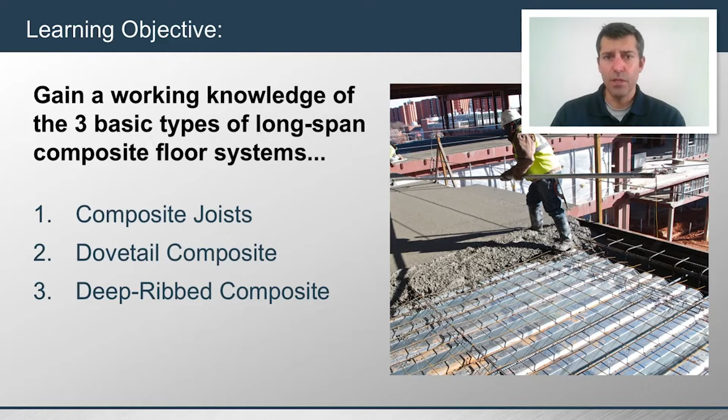The learning objectives for this short course are to gain a working knowledge of the three types of long-span composite floor systems that support multi-story design and construction: composite joists, dovetail composite, and deep-ribbed composite, including installation images of these three unique systems. This multi-story course applies to construction for both residential and commercial projects.

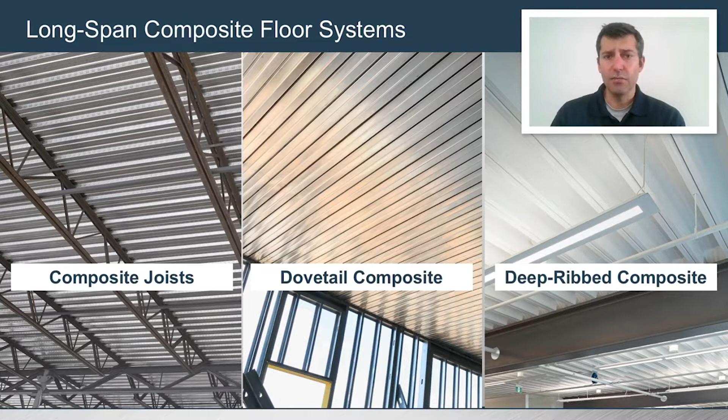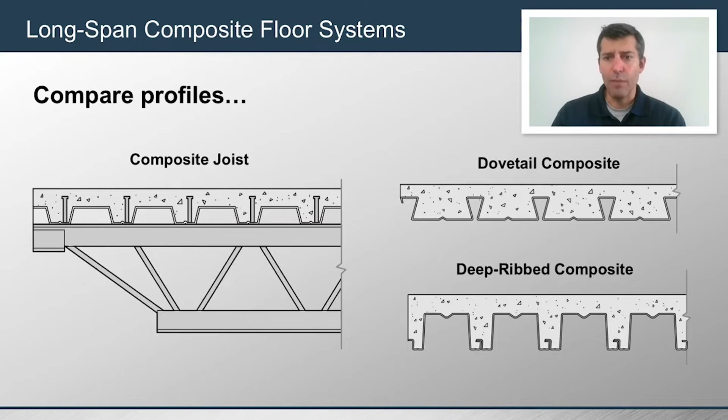Graphic cross-sections illustrate the distinguishing profiles of these systems. The joist, with its characteristic diagonal web members, has a standard deck. Dovetail and deep-ribbed deck represent deck-only long-span composite floor solutions.

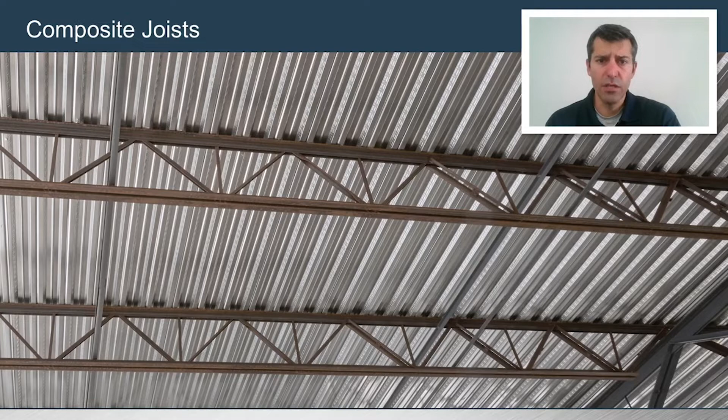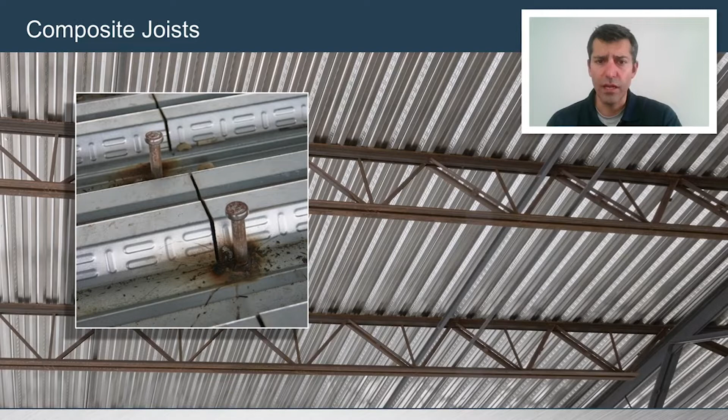Let's start with composite joists. Similar to its counterpart in roof applications, the composite joist has its familiar shape, the defining feature being the studs welded to the top chords of the joist. You will also note the composite floor deck with its identifying trait, embossed sidewalls.

Composite steel joists allow long, clear spans beyond 60 feet. Compared to wide flange beams, they are significantly lighter, which can lighten the entire structural system. In its totality, there is an overall reduction in steel. This leads not only to material savings, but also savings in manufacturing, shipping, on-site staging, and erection costs. The combined time saved may even lead to earlier building occupancy.

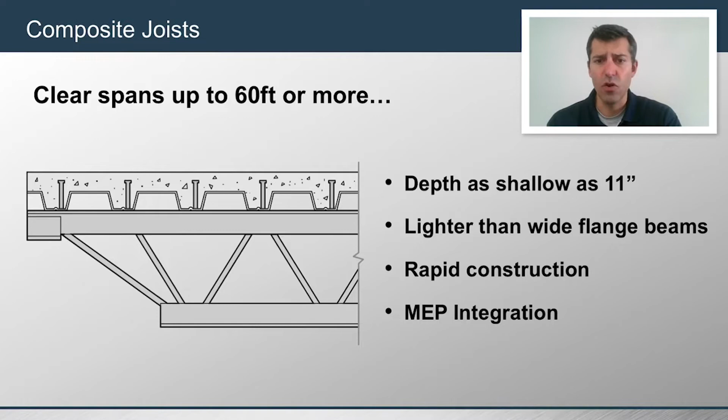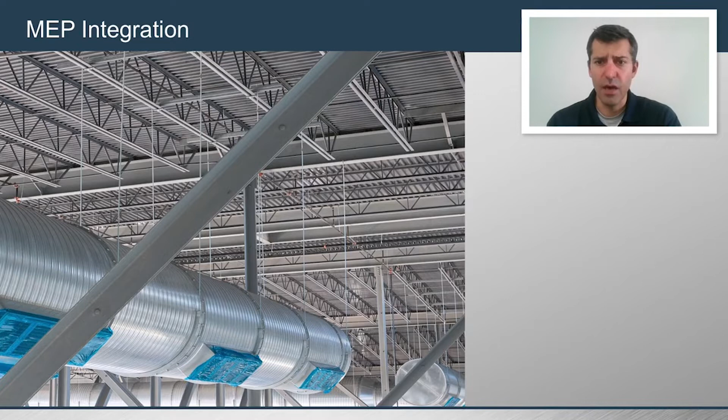Composite joists require no shoring, and identical to roof joists, building system integration is accompanied by web openings. For larger ductwork, the webbing can employ the design of a Vierendeel.

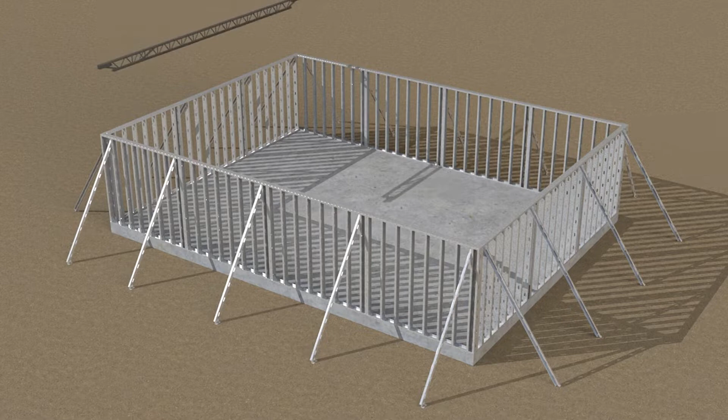A composite joist floor system is efficient to build and readily deployable in any market. In this instance, we'll assume a cold-formed steel bearing wall, but it can be a component in any structural system, steel or concrete tilt-up, for example.

The joists end bearing in this scenario, followed by the bridging. It should be noted, bridging types and end bearing conditions like top chord extensions are elaborated on in full-length courses.

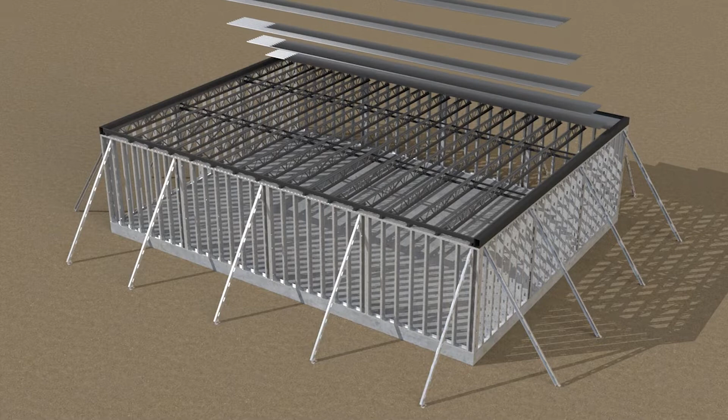The composite deck can be either a form deck, 1.5 inches, 2 inch, or 3 inches deep. Shear studs, followed by welded wire mesh, all come together to establish a unified, load-bearing system with the concrete topping slab. The structural goal is the composite action.

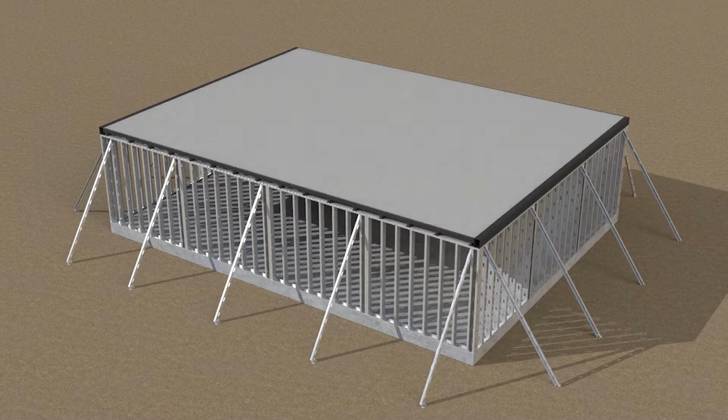Both the deck and the joist have a means to key into the concrete. This bond combines the tensile qualities of steel with the compressive qualities of concrete. Additionally, the concrete topping slab may provide benefits in fire rating and vibration, which varies based on total slab depth. Again, we see the combination of concrete and steel, playing to each material's advantage.

The shear studs attach through the decking to the joists embedded in the cured concrete. Note that composite joists, to achieve a fire rating, would require protection. That could be in the form of fire-resistive coatings like intumescent paint, or boxing them out in fire-rated gypsum wallboard.

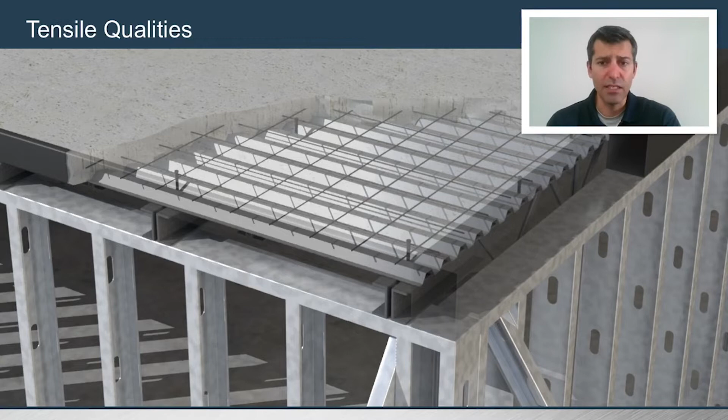The result can be concealed in a drywall hard lid or exposed, contingent on aesthetic goals and fire rating for the occupancy. Composite joists are just one option for large-scale open floor plan projects, ideal for the expansive showroom of this Ferrari dealership.

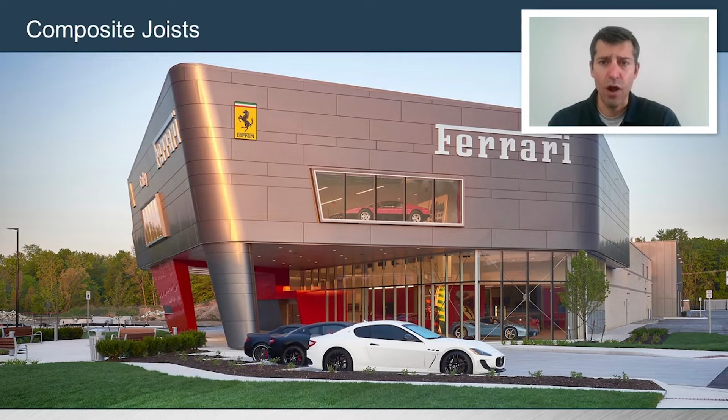Next, we'll shift our attention to dovetail composite. This profile has options in 2 inch and 3.5 inch, having long spans relative to thin floor plates. With simple spans able to achieve 17 feet and continuous spans up to 28 feet, projects can go up quickly and efficiently without specialized labor.

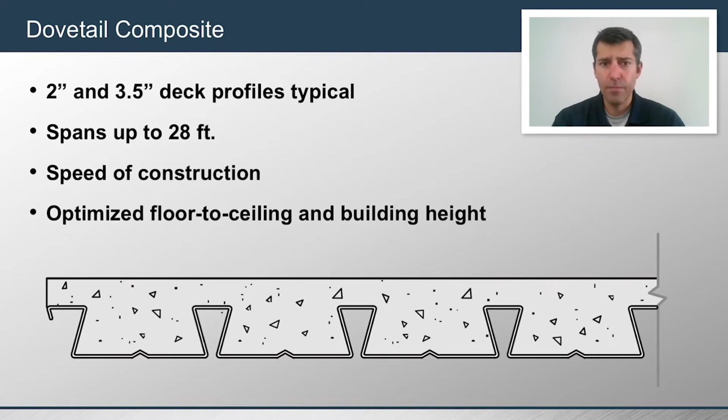A major advantage of the system is the fire-rated designs. The classic slab design is the 2 inch dovetail that, with a 3.25 inch topping slab, elicits a 2-hour UL-rated assembly in only a 5.25 inch total slab depth. The assembly has multiple variables, creating flexible solutions based on the design team's criteria.

Specifying lightweight concrete in lieu of normal weight, the cover is reduced, lightening the entire system. Picking up an hour rating from Type X gypsum wallboard can also reduce concrete volume. Solutions can result in gaining full performance with only a 4-inch total slab depth. These monolithic thin floor assemblies create floor-to-ceiling heights and optimize total building height.

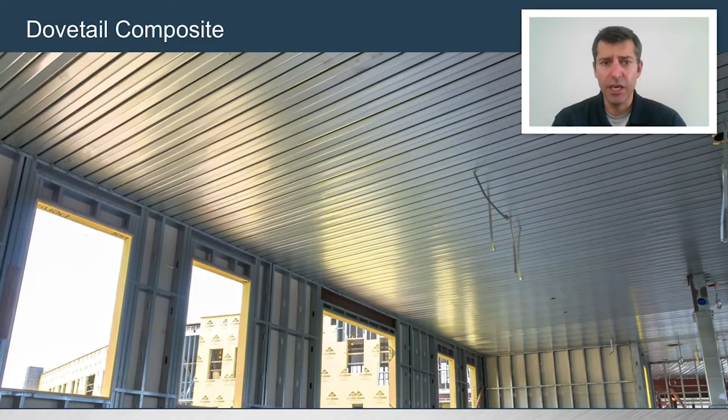Panelizing metal stud walls has revolutionized mid-rise construction. All the benefits of steel construction economize to fit into any project budget.

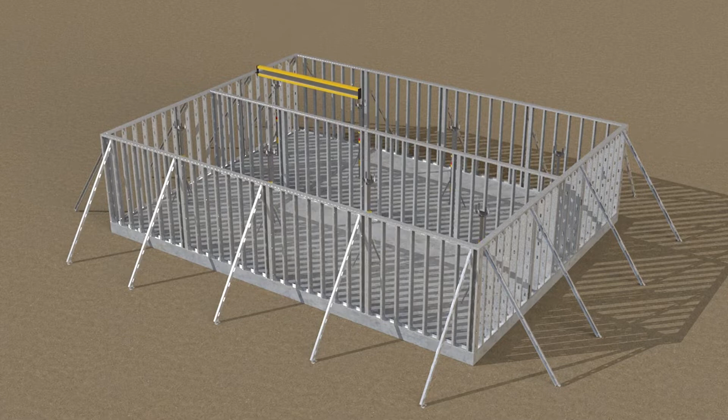Assume the middle bearing wall requires fire separation. Next come the row of temporary shoring in yellow. An alternative design, like using 3.5-inch dovetail, may be able to simple span a given condition. But in this animation, we're assuming the 2-inch dovetail requires at least one row of shoring. Pour stops prior to the deck installation.

Again, the erection is similar to any composite floor deck. Note the accessory at the head of wall. We'll come back to that in a moment, as the dovetail deck is installed.

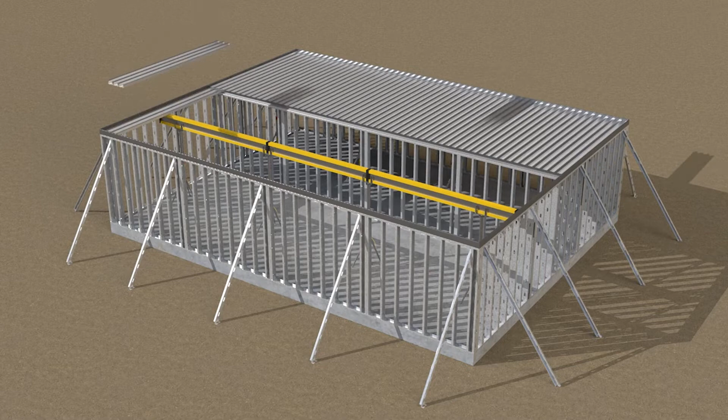Dovetail Composite is ideal for mid-rise construction. The market has seen the greatest benefit is multi-story residential. These are hotels, dormitories, senior living, any kind of multifamily design.

Let's focus on the cutaway of the assembly. The deck bearing on metal studs, concrete filling the cavity. No permanent interstitial beams, only temporary shoring until concrete comes up to strength. The result is an uninterrupted fire-rated slab.

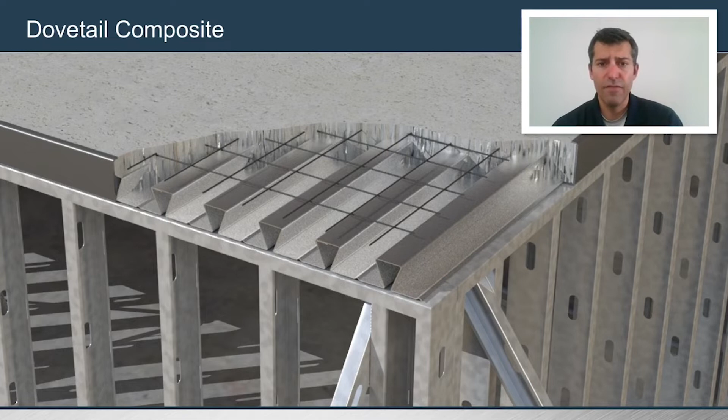Transitioning to the head of wall detail. This is the brake metal accessory mentioned during the animation. It creates a condition that does not require fire sealant at this condition. Sealants can be expensive and labor-intensive to install.

By offsetting the dovetails, it creates a UL-rated head of wall, eliminating potential fire transfer at the bearing wall between the units. The concrete cover is continuous. The fire sealant would be required at conditions in which the deck flutes are not staggered, either continuous spans or end-of-wall conditions. Strategies to streamline and address constructability are elaborated upon in the hour-long course.

Additional accessories available by the deck manufacturer are hanging devices specific to the dovetail profile. They are typically used for lighting, plumbing, and ductwork. The wedge-shaped hangers are adjustable and can be relocated anytime if desired.

Now, that's not typically a strength of the residential system, and it's more so popular in exposed roof deck applications, as it avoids the need to permanently puncture the deck.

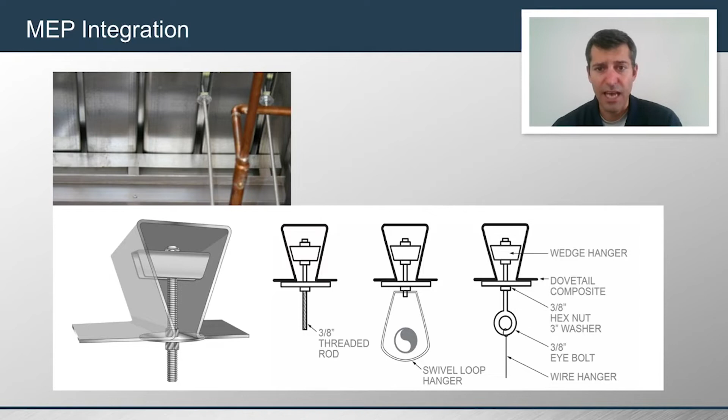Critical to any successful project is properly addressing acoustics. In residential construction, the key metrics are sound transmission class and impact insulation class. 50 for each is the bare minimum. Building up the floor assembly or ceiling assembly helps to boost STC and IIC.

Commercial applications like a multi-story office with an open floor plan are concerned with a different aspect of sound, NRC. Acoustic ceiling tile is the standard fare solution to ambient noise, but there are ways to address NRC values by exposing the floor deck. Dovetail Composite Acoustical, in the upper right-hand corner, gives the design team the aesthetic of an architectural deck with a performance that can transcend acoustical tile.

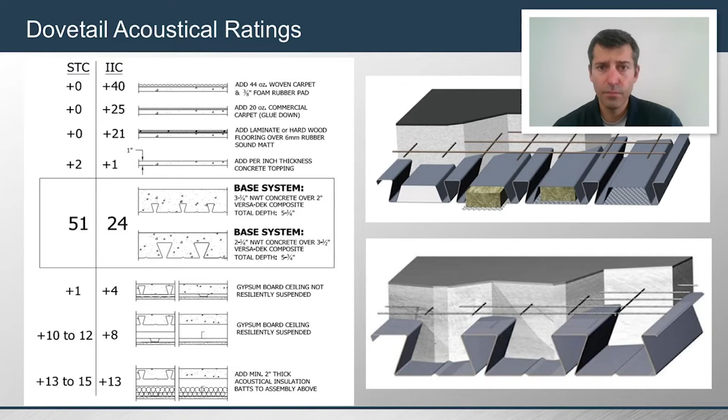Cold-formed steel or light gauge metal framing is replacing platform wood construction around the country for a number of reasons. Wood is susceptible to dry rot, insects, and fire right up until the moment that it's rocked. The design flexibility of wood and steel may be similar, but the quality and longevity of steel is a substantial improvement. Building owners have embraced composite design and its long-term value.

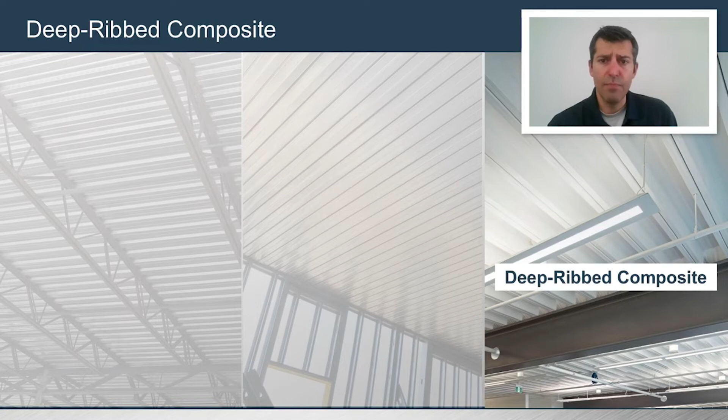We'll continue with a long-span composite floor system that you may not be so familiar with, deep-ribbed composite. As with the other systems, this is equally applicable for commercial and residential construction.

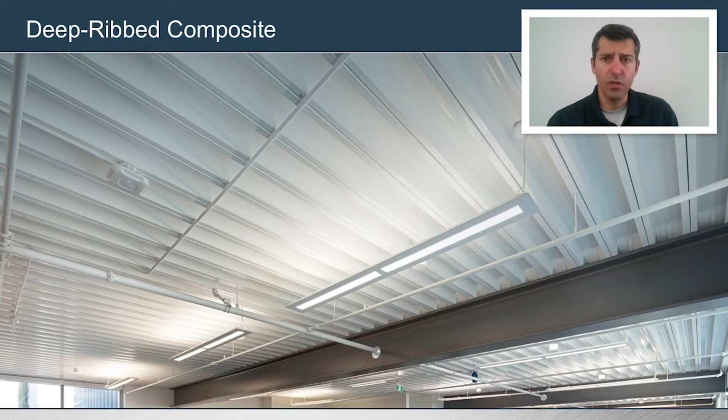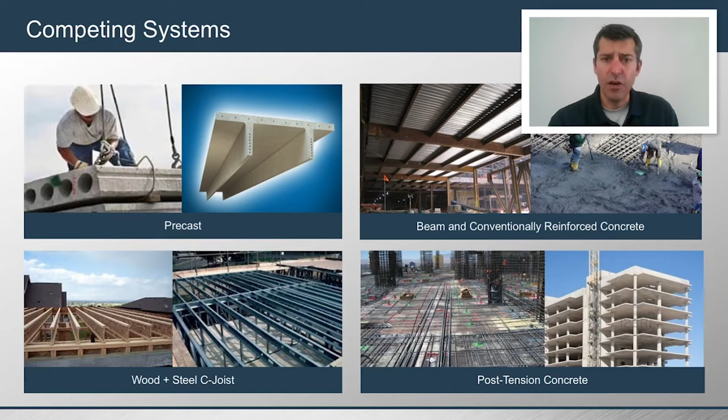Unlike composite joists and dovetail composite, however, or even other steel products in general, even wood construction, deep fluted deck is competing more so with concrete, both precast planks and post-tension. It can achieve the spans of concrete, but up to 40% lighter. Seismic areas of the country find this particularly advantageous.

The deep rib deck profile provides for long, clear spans, up to 36 feet, in a total slab depth less than 12 inches thick. For less shoring during construction, the system can support unshored spans up to 22 feet. Another variable is the strength of the concrete, 4,000, 5,000, and 6,000 psi. This puts a lot of factors in play to tailor your custom optimal solution.

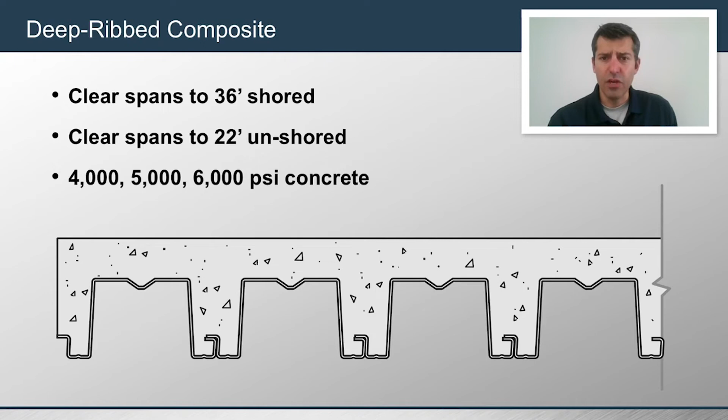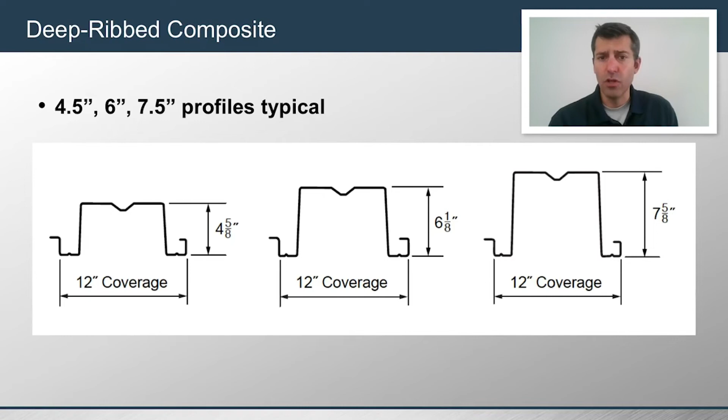3 progressively deeper profiles are typical of these systems: 4.5, 6, and 7.5 inch nominal. Residential tends to utilize the 4.5 and 6 inch hats for long span composite design. They all have counterparts in cellular acoustical options, and those profiles tend to favor commercial office construction. We'll talk about that when we address acoustics.

Let's discuss fire ratings. Simply put, the addition of 5-inch normal weight or lightweight concrete cover yields a 2-hour UL unprotected floor assembly. A 4.25 topping slab yields a 1-hour rating.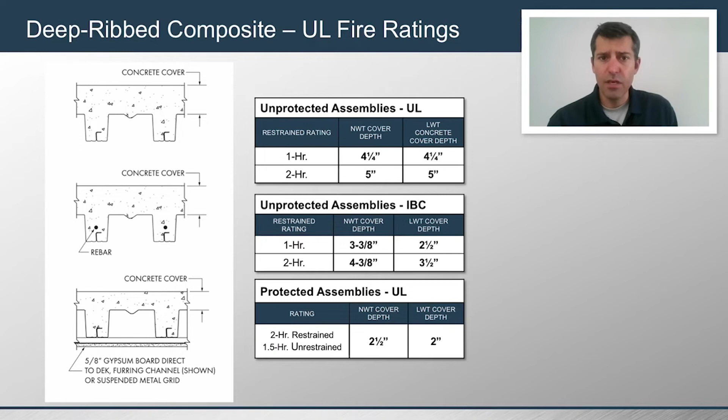Similar to Dovetail Composite, we do see quite a few solutions opt for the protected assembly, since having a hard lid in gypsum wallboard is most prevalent in both commercial and residential construction.

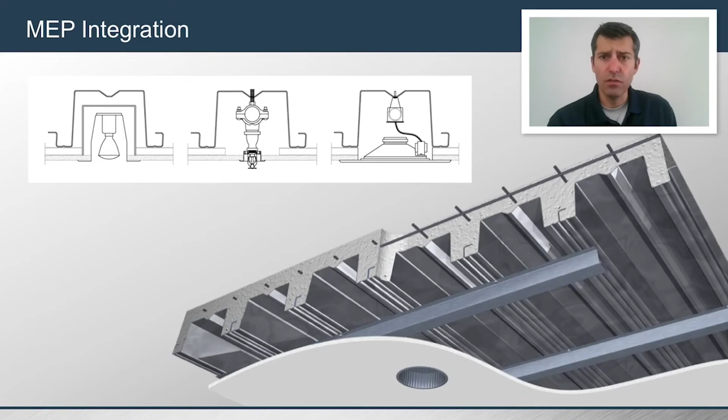To maintain consistency, we'll go back to our metal stud wall animation. As you'll see later in the presentation, in addition to light gauge metal framing, deep fluted deck is adaptable to any structural frame. Due to its profile depth and shape, the deck can simply span our 30-foot by 40-foot example

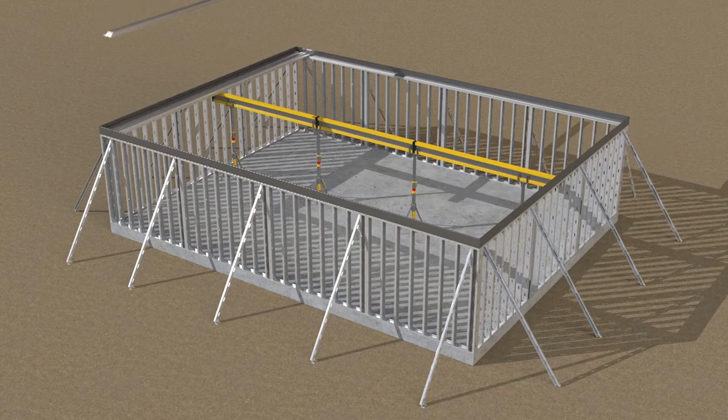with only a single row of shoring at midspan. The deck hats, at 12 inches wide, can easily be maneuvered into place with as few as 2 workers. Note the closed ends. This is done in line at the deck mill during the production process.

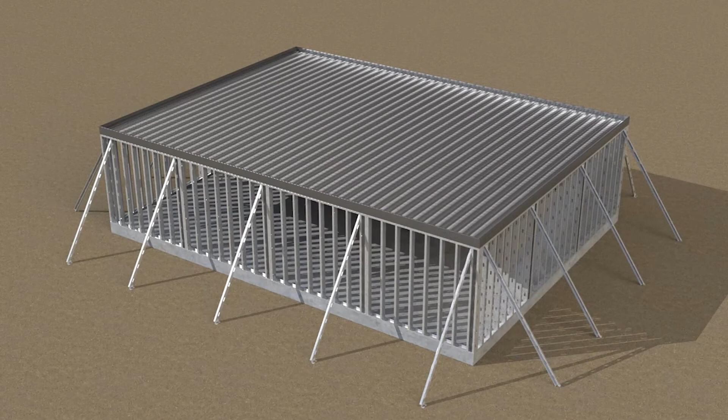This facilitates a concrete slab beam at the supports without installing any additional accessories or brake metal piece. Welded wire mesh goes down, and there may be possibility for reinforcing bar to supplement. And as with any deck, the temporary shoring is removed when design strength is reached, allowing for the other trades to start their scope.

We'll zoom into a graphic cutaway. The closed ends on display, the side laps are self-aligning and nesting. A proprietary tool to stitch the side laps can expedite the process, but not necessarily required. Concrete keys into the steel, creating a mechanical bond at the connection, adding to the structural capacity.

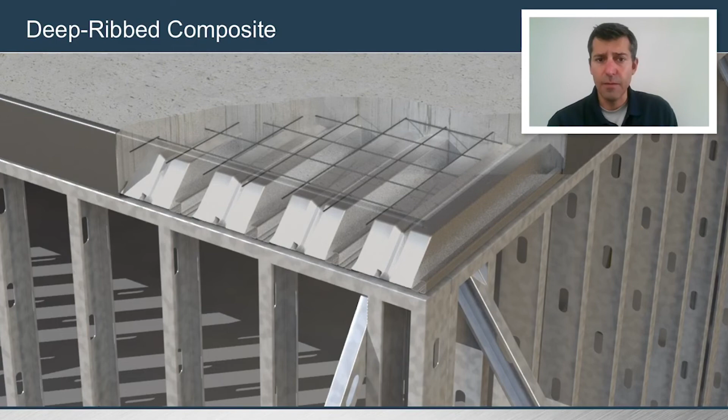As mentioned, deep-ribbed composite can be supported by any structural system. Structural steel options include steel channels, wide flange beams. Trying to maximize the clear floor height, one solution is dropping a ledger in the web of the wide flange. That's shown in the upper left-hand corner.

Bearing on concrete block wall is also a possibility. Even bearing on existing structure. Now, these are projects that are typically aggressive renovations, as with historical buildings being brought up to code or taking on a new life, while trying to preserve its facade and maintain its architectural integrity.

In the top middle, let's briefly discuss composite beams. All of the steel beam and column solutions could require fire protection. However, a composite beam does not.

Plate steel is press broken into the beam shape. It receives a rebar cage, and once filled with concrete, it creates a fire-rated solution. No need for drywall or intumescent coatings. It is a wholly unprotected system in a monolithic slab.

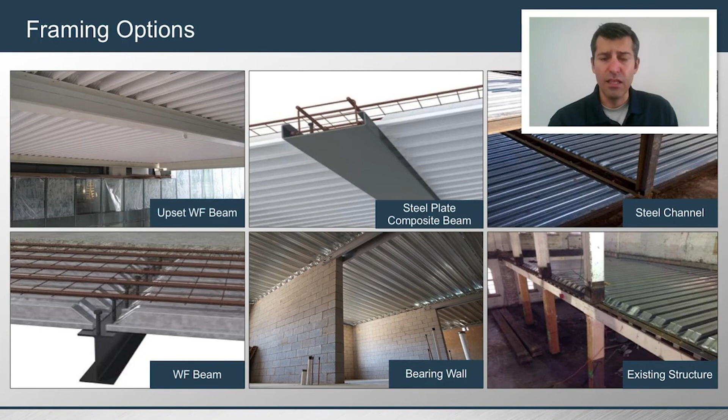At spans this significant, long-term deflection and floor vibration become governing factors. Verify that the deck manufacturer has several methods to evaluate both vibration and long-term deflection.

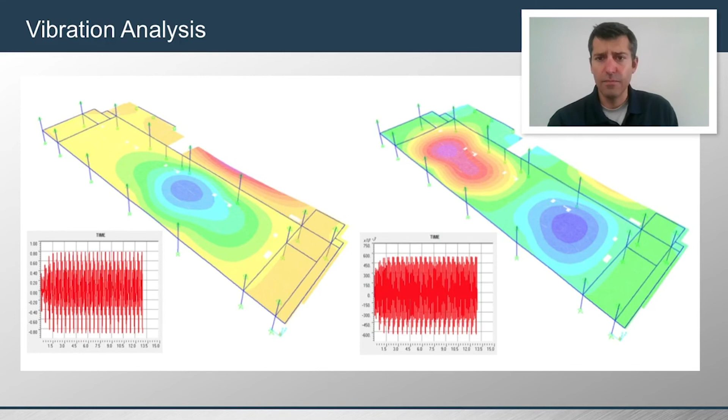Acoustical ratings for deep-ribbed composite through the lens of STC, IIC, and NRC. Long-span composite systems have identical paths to blocking sound transmission, either supplementing floor or ceiling materials, typically both to increase STC and IIC.

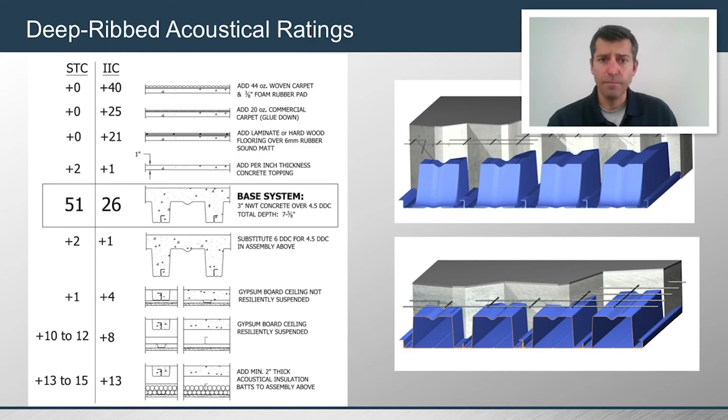These solutions can apply for any kind of multi-story project.

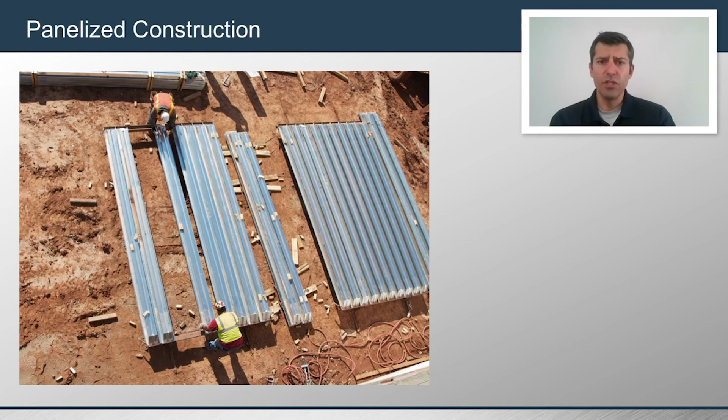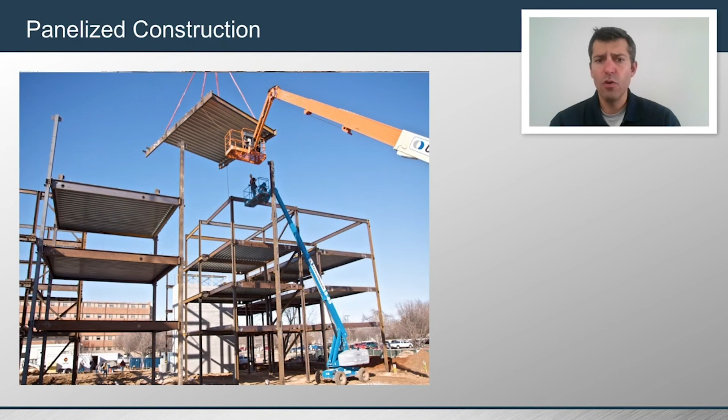And lastly, let's discuss panelizing. The next evolution of steel construction will be some form of prefabrication. As it currently stands, this can be done at the project site, laydown space permitting. Structural bays are assembled on the ground, and the deck sections are craned into place. Eventually, this work may be accomplished off-site in a controlled environment.

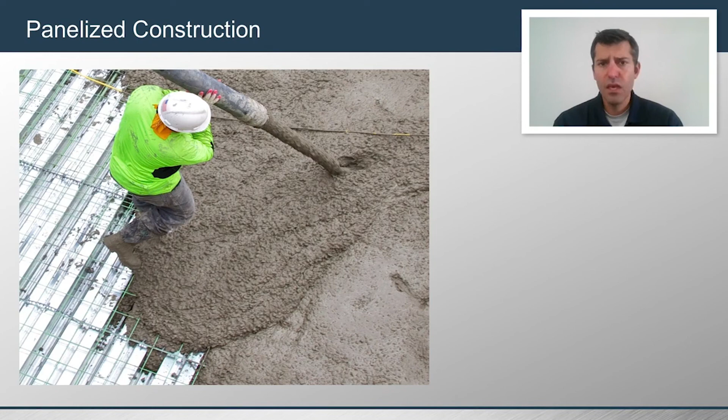The three systems bring greater creativity to multi-story building design and construction. In conclusion, they are increasing the overall building performance and achieving the desired aesthetics.